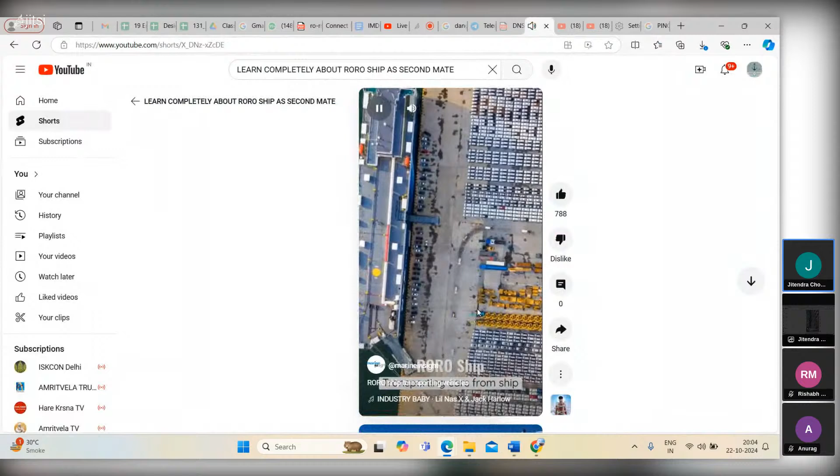So we start with just a short video reel of Ro-Ro ships, how the Ro-Ro ships are. We're going to start with Ro-Ro ships. So here you can see how on a Ro-Ro ship the cars are rolled on and rolled off the car carrier from a yard, and then it sails in the port.

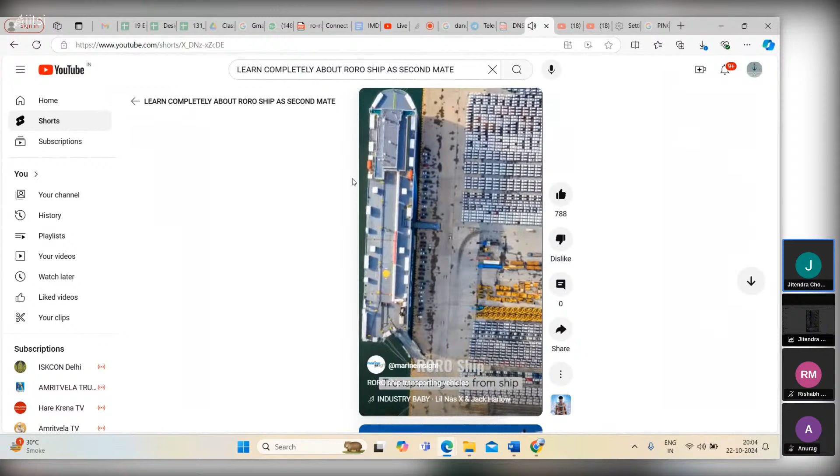So let's start with cargo operations of the Ro-Ro ship, prepared by Captain Dinyar Sidwa. So we'll go through these things: definitions, abbreviations, introduction to the Ro-Ro shipping business, types of Ro-Ro cargoes, Ro-Ro vessel types, arrangements of the doors, bow doors and stern doors, and then

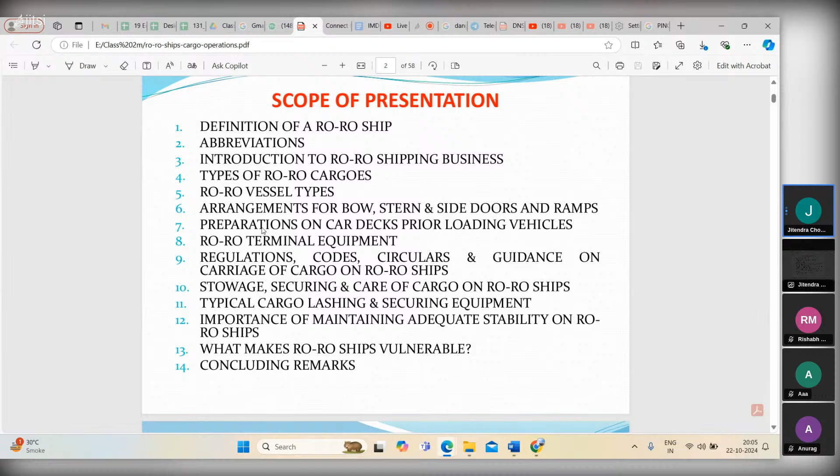preparation for loading on the decks, the requirements of the equipment, terminal equipment, codes, circulars, stowage, securing, care of cargoes, different lashing and securing requirements. How do we maintain stability on Ro-Ro ships? What are the main issues and problems regarding stability, including humans?

So what is a Ro-Ro ship basically? Vehicles or moving transport cargoes are rolled on, rolled off. Each has a few decks, either closed or open, not normally subdivided in any way, and generally running the entire length of the ship, in which goods, vehicles, trailers, and other transport units, containers, pallets, and other receptacles can be loaded or unloaded normally in a horizontal direction.

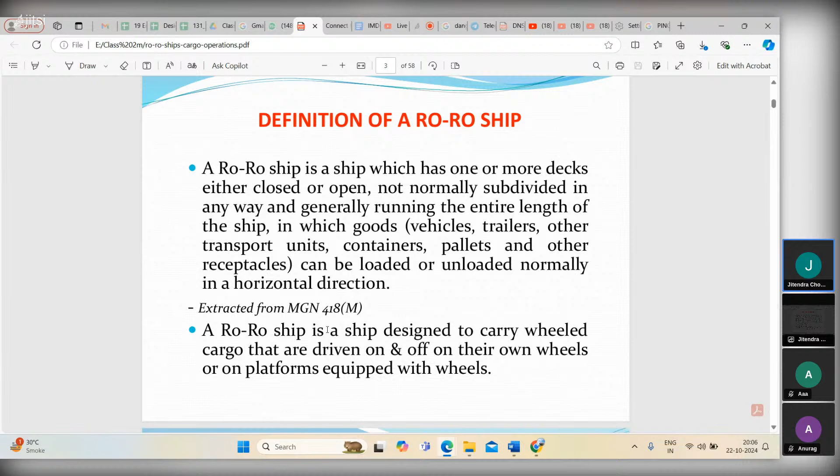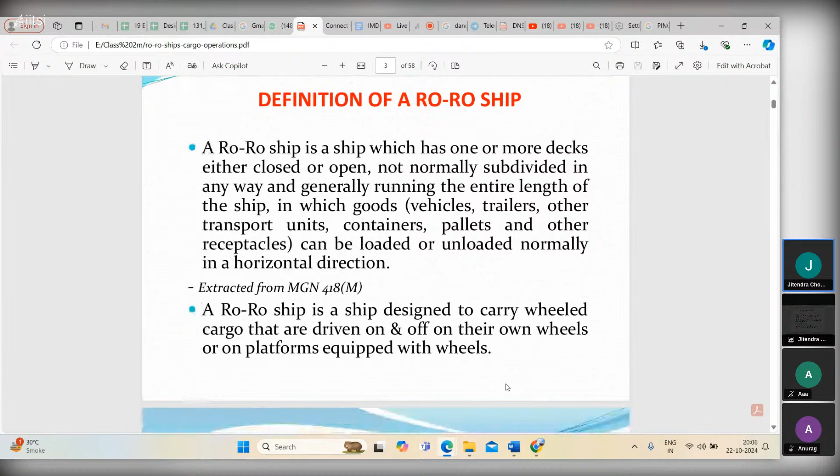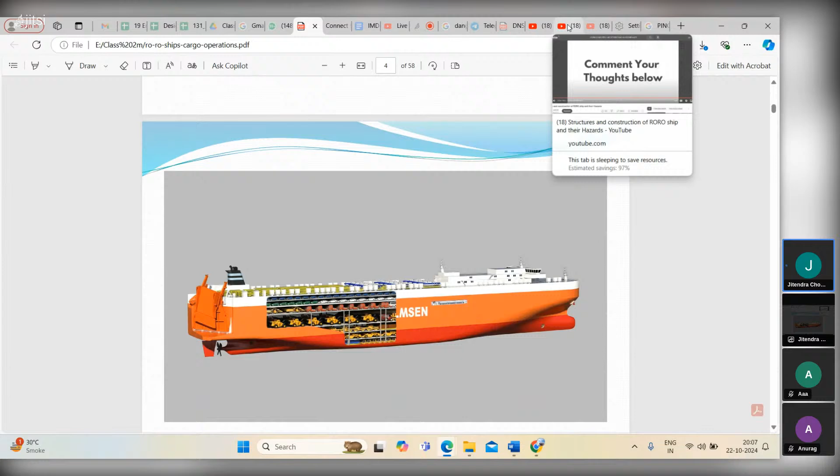A Ro-Ro ship is designed to carry wheeled cargoes that are driven on and off on their own wheels or on platforms equipped with wheels. So, what are vehicle cargoes like? On so many different decks we are loading cars, and for each deck we have many ventilators and construction like that. In between we'll see this animated video where you can get a general idea of how the Ro-Ro is inside.

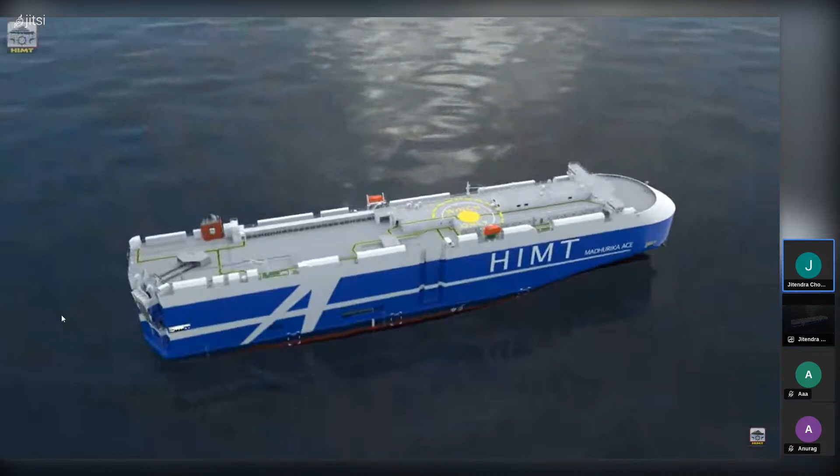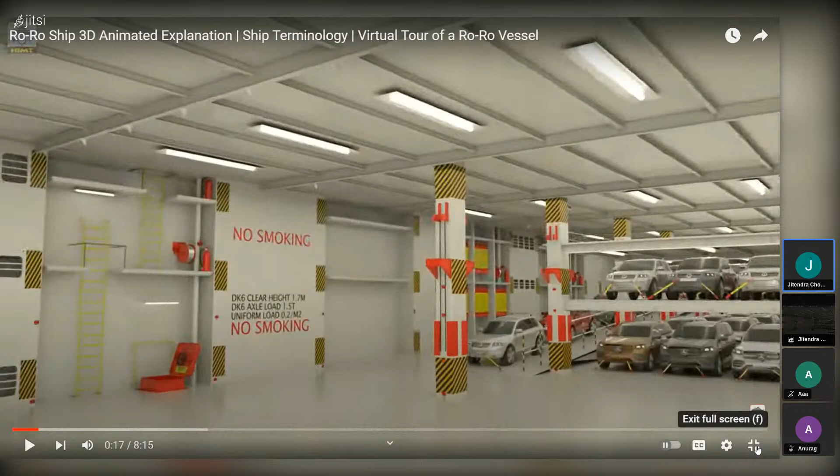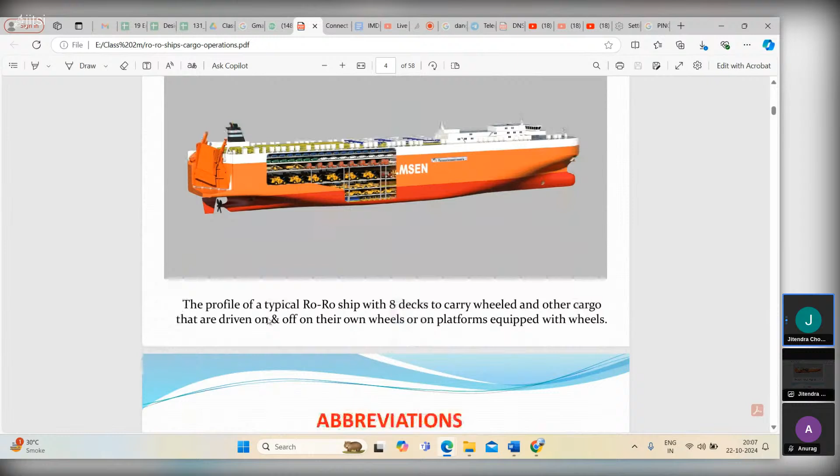There are a lot of cars loaded inside. So like this you have all the cars being loaded inside, and all the things are there: vents, accommodation and doors. This is a typical profile of a Ro-Ro ship with 8 decks. You can see 1, 2, 3, 4, 5, 6, 7, 8 to carry wheeled and other cargo. These decks are movable, adjustable for height, and divisible. A lot of adjustments are there as per the cargo to be loaded.

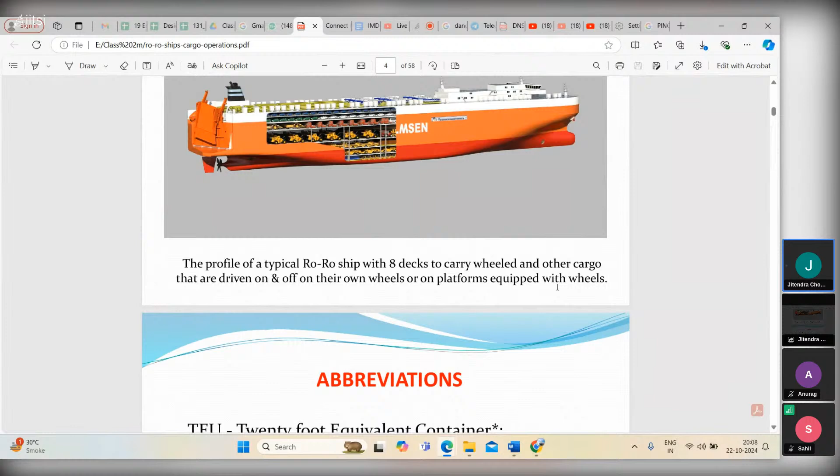And other cargo that is driven on and off on its own wheels or on platforms equipped with wheels. So either a cargo is coming on its own wheels, or it is driven on a tractor, flatbed truck, trailer like that. Like containers, you have the twenty-foot equivalent unit. PCTC, pure car truck carrier; LCTC, large car truck carrier; PCC, pure car carrier. These are the types of ships, carrying pure cars or trucks or whatever type of cargo.

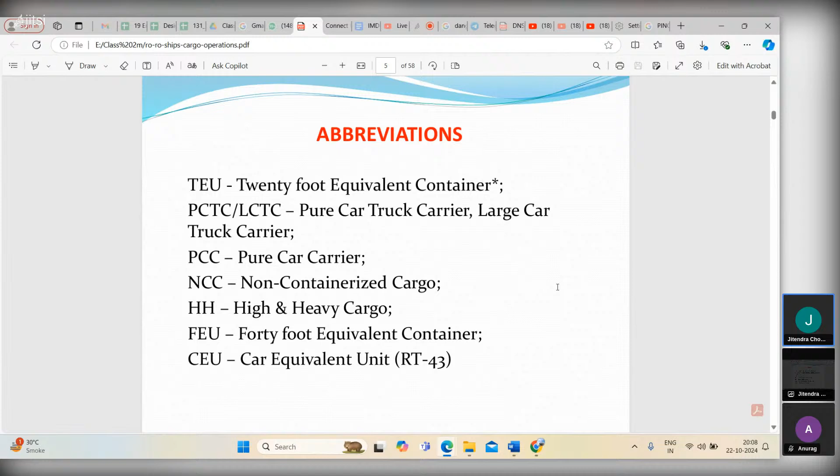NCC, non-containerized cargo. HH, heavy and high. FEU, forty-foot equivalent unit. CEU, car equivalent unit. So when did Ro-Ro ships mostly start? Around the 1940s and early 1950s, almost 85 years ago. The main idea was to carry commercial vehicles, men and material, from amphibious craft used during the war to roll out tanks, soldiers and combat equipment on sloping beaches. Necessity is the mother of invention. During the war it was really needed, so it started and then continued.

So the idea of carrying commercial vehicles, men and materials is there. Then you have so much wheeled cargo. Say I am in Gujarat now and I need a car here, so how will I transport it? By road, a truck will carry it, which will be cheaper, or by train, but it has to be safe. By train sometimes it's not quite safe. Even on a ship, in bulk it might be cheaper, but it is exposed to weather, rolling, pitching and so many things. Damage is quite easily possible. That's the biggest challenge, and there are some other challenges we'll see.

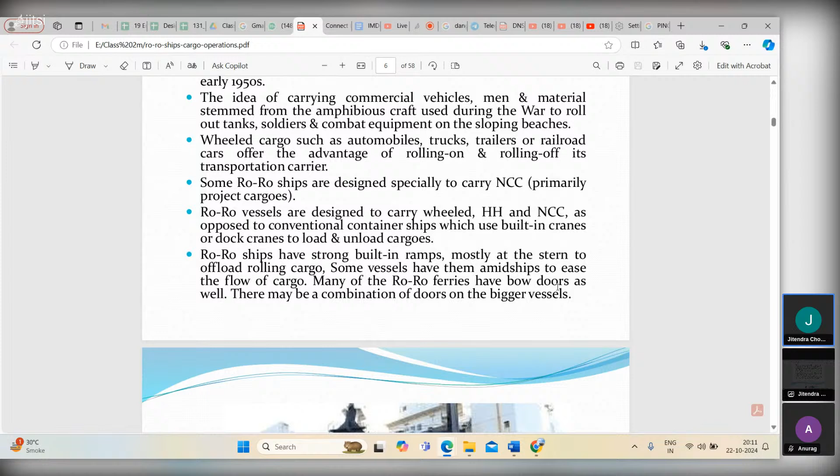So Ro-Ro ships are designed especially to carry NCC, primarily project cargoes. There are some special Ro-Ro ships which carry special project cargoes. Roll on, roll off means there are wheels mostly, or cargo supported by wheels, HH and NCC, as opposed to conventional container ships which use built-in cranes or dock cranes. Sometimes we also use cranes if the cargo is not on its wheels, or it doesn't have wheels, or for some reason it cannot be rolled in.

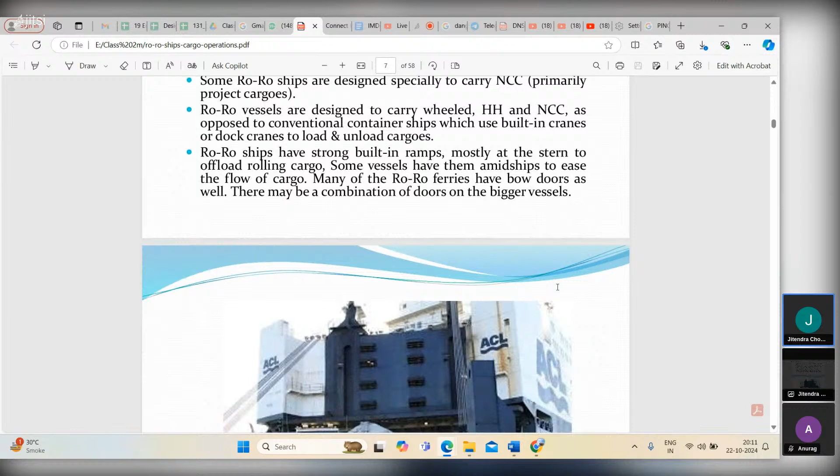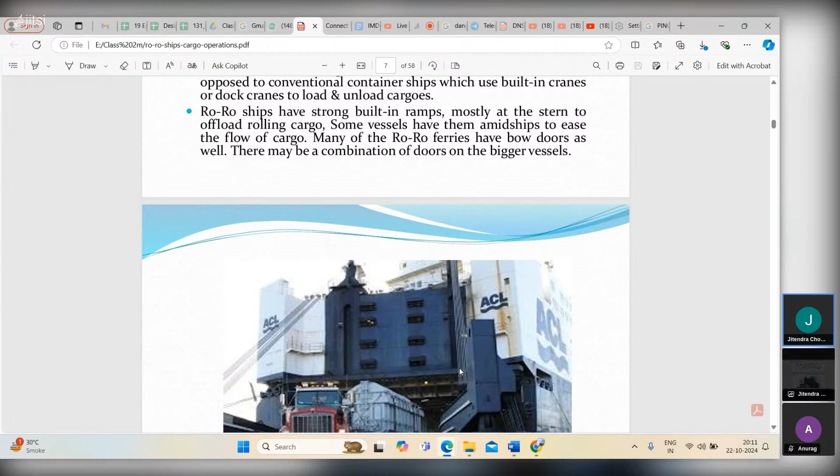Then of course a Ro-Ro ship mostly has built-in ramps, like you see here, this blue-colored built-in ramp is down. This is a built-in ramp open for this ship.

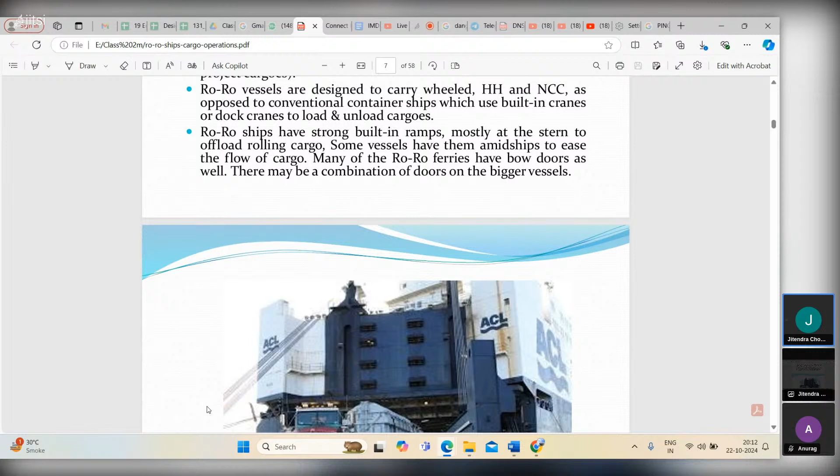Mostly they are in the stern, ramps to offload the rolling cargo, and some vessels have them amidship to ease the flow of cargo. Depending on the type of ship, they can be in the stern or in the midship, or you can have one small door and one big door. Like local ferries, you have forward and aft, or one on the side, one on the back. So there are different combinations possible on different ships.

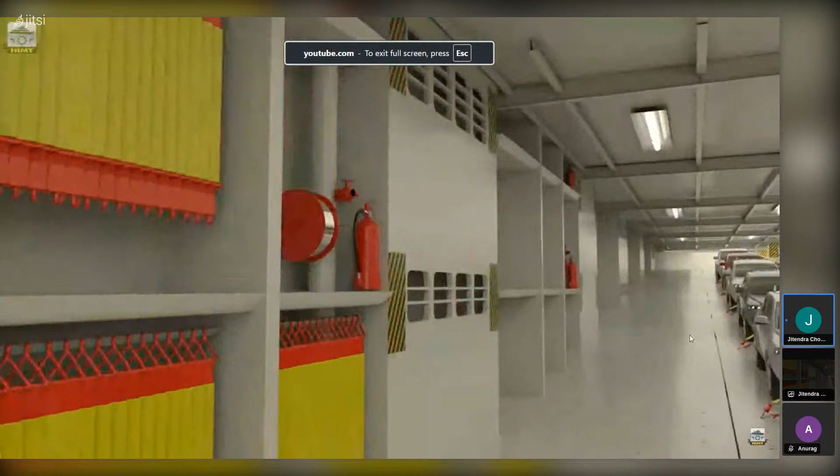So let's see a little more what is there in the cargo ship. You can see these nice clean decks with all the firefighting equipment, and the cars are properly lashed, and all the EEBD or whatever emergency firefighting equipment are there. And then there are zebra markings everywhere for cautions or highlighting, especially in case there is a blackout or something.

Excuse me, sir. Do car carriers follow any specific code except the cargo securing manual? No, there is not a particular specific code for a car carrier, only the other lashing codes like the cargo securing manual or code of safe working practices. Okay, sir.

In some trades, it is customary that contracts give the ship owner the right to transport a percentage of the cargo owner's production quantity. So you have to give some percentage of cargo for the owner, of course. The shipments are normally scheduled where the majority of itineraries are predetermined and regulated by contract. So here again, like container ships, the timings and port rotation are very important.

Like when we are transporting any courier, especially an Amazon parcel, you keep tracking it, all those things. Same way here also people are waiting for their cars, so it cannot be late, maybe 1 or 2 hours, but normally ships get delayed for 1, 2, 3 days, if you're on anchorage maybe 10 days also. But in this type of transport, it has to be as precise to the time as possible, because it will affect your customer reviews and responses and hence your earnings.

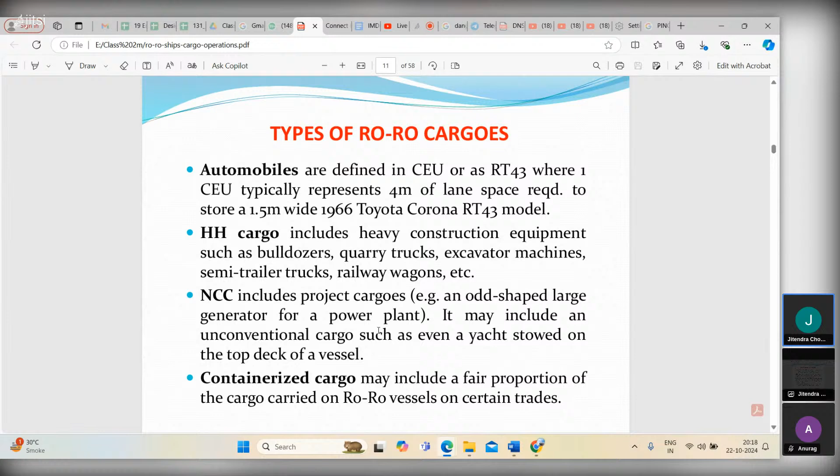So what are the different types of RoRo cargos? Automobiles, where you have CEU, car equivalent unit, RT43. So different sizes or different models of automobiles, heavy and high cargos, bulldozers, trucks, machines. Then unconventional cargo, such as even a yacht stowed on the top deck of a vessel, or odd-shaped cargo like a large generator of a power plant. Then different containers also you can sometimes load on a car carrier. Sometimes you load cars in containers.

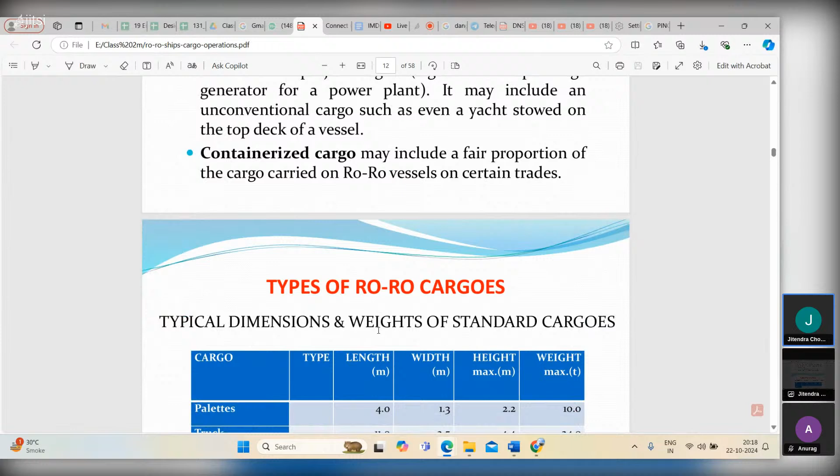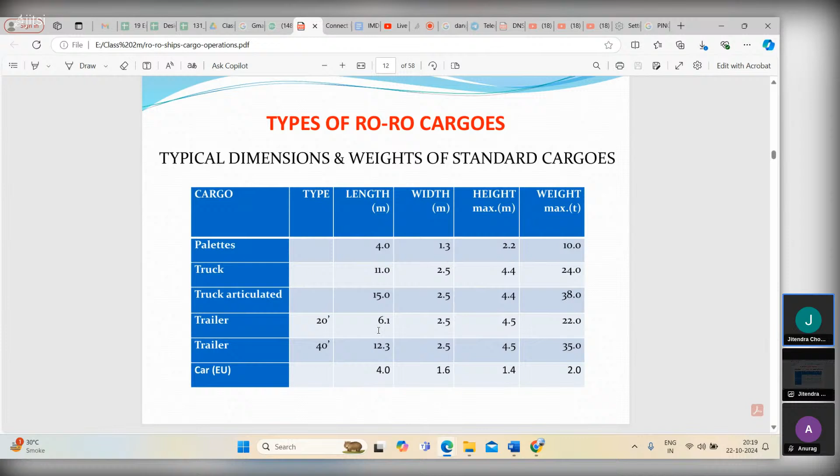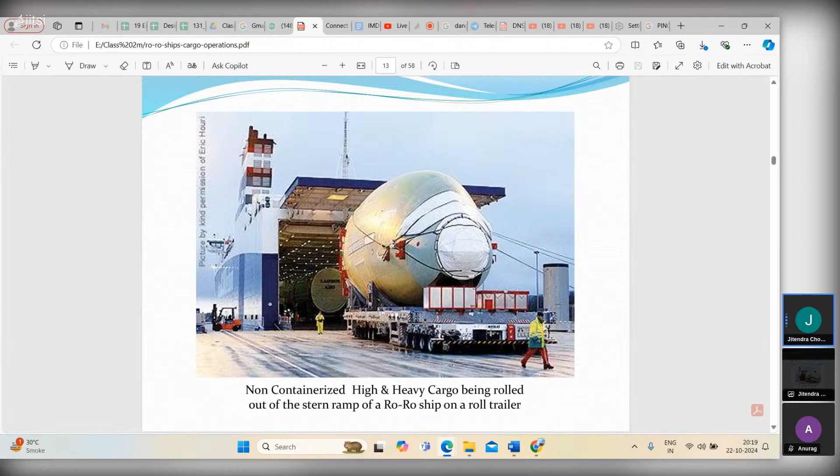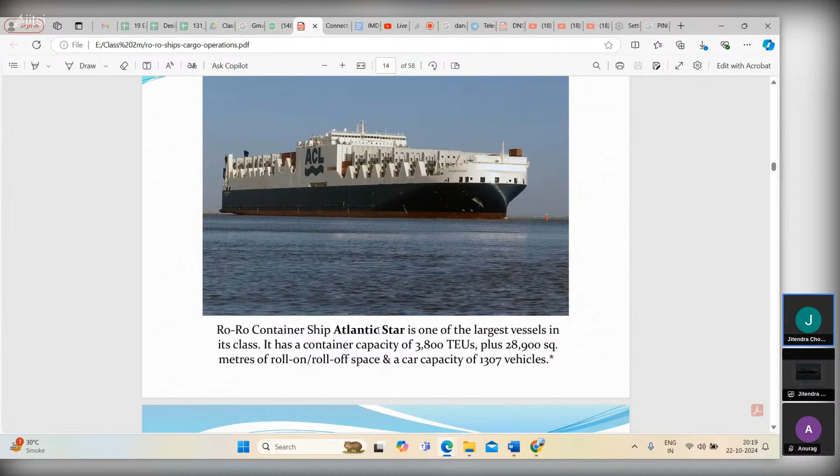So what are the different types of RoRo cargos? Pallets, truck, articulated trailer, car, with length and height max. So the different sizes of standard cargoes are given here. Now this is a very different high and heavy cargo, some special machinery rolling out of a stern ramp. It is one of the largest ro-ro container ships, 3,800 TEUs. So let's continue our animation a little.

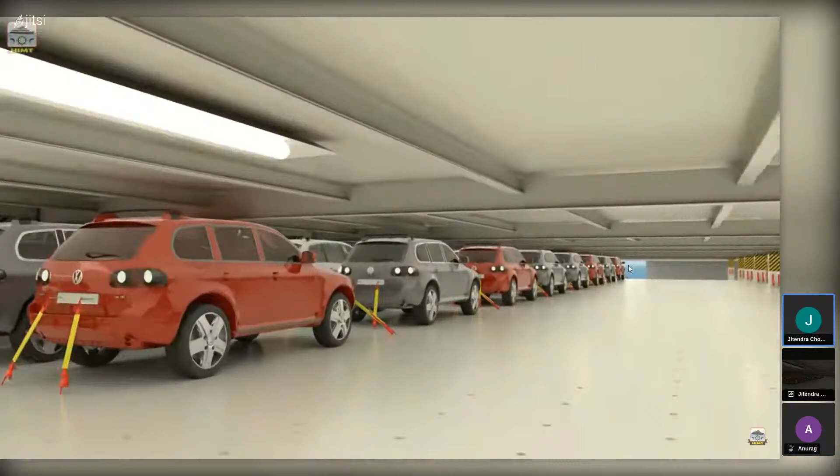So they are all not like there is a proper spacing requirement as per this cargo securing. How much should be the distance in between the vehicles: athwartship 30-40 centimeter and forward and aft 60-70 centimeter. We all will see all those. But here you can see how closely they are stowed and how they are lashed neatly in different places, yet seemingly overlapping each other's area. But it's not recommended or advised. We have to check properly.

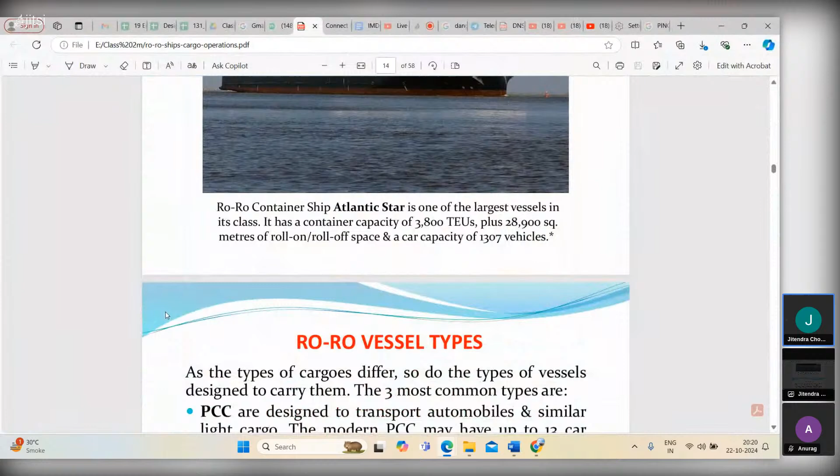And the angle of the lashings from the bottom horizontal and side horizontal. All our angles are important, 30 to 45 degrees like that. Okay, let's continue. So this is the biggest container ship, 3,800 TEUs, and also works with roll-on, roll-off, with a car capacity of 1,300 vehicles.

What are the different types of ro-ro vessels? Types of vessels designed to carry them. The three most common types: PCC, as we saw, pure car carriers. Two of them at most are hoistable. These type of vessels are usually the smallest of the ro-ro designs and typically have a length of less than 200 meters. Cargo capacity ranges from 1,000 to 6,500 RT-43 or CEU.

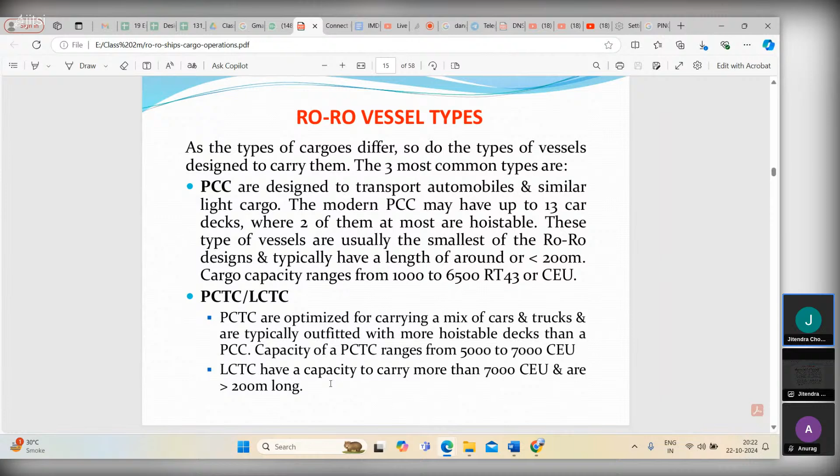PCTC, LCTC, carrying a mix of cars and trucks and typically outfitted with more hoistable decks than a PCC. Capacity of a PCTC ranges from 5,000 to 7,000 CEU. LCTCs carry more than 7,000 CEU and are more than 200 meters long. Ro-ro cargo vessels are designed to carry mostly HH and NCC, with automobiles and containers as supplementary cargo. A typical vessel has a length of between 240 and 300 meters.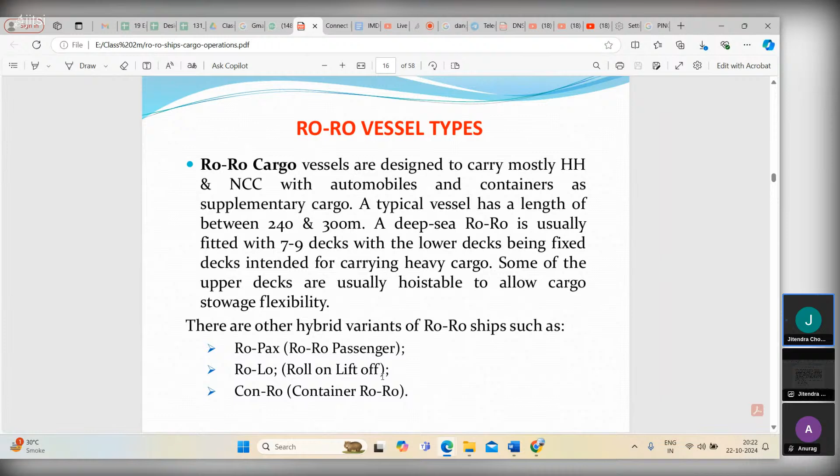A deep sea ro-ro is usually fitted with 7 to 9 decks, with the lower decks being fixed decks intended for carrying heavy cargo. Some of the upper decks are usually hoistable to allow cargo stowage flexibility. There are other hybrid variants of ro-ro ships such as ro-pax, so it has passengers also, roll-on and lift-off, like lifting for some cargoes, con-ro, container and ro-ro. So there can be many combinations.

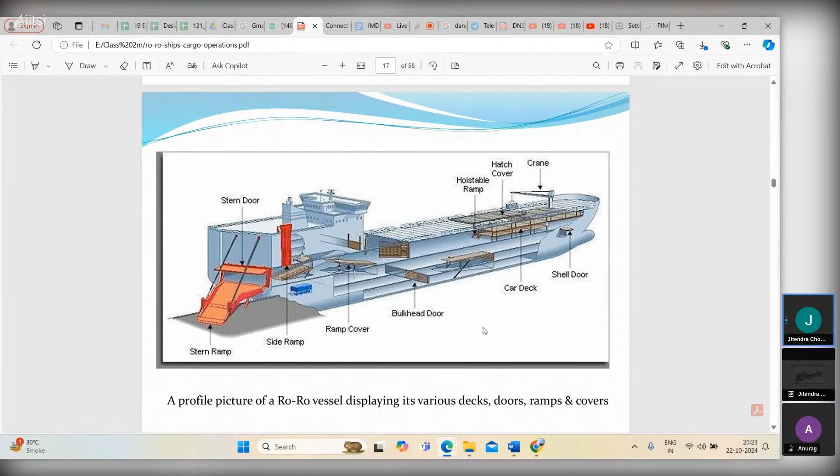So as I told you in the starting, these ramps are hoistable. You can adjust the height and segregate them, make partitions as per the cargo to be loaded. And they have full hatch covers, cranes on the ship itself. So you have a side ramp and a stern ramp. So you have both. This is the ramp cover, bulkhead door, the car decks, shell door for pilots or something. So this is a profile picture of a ro-ro vessel displaying its various decks and ramps.

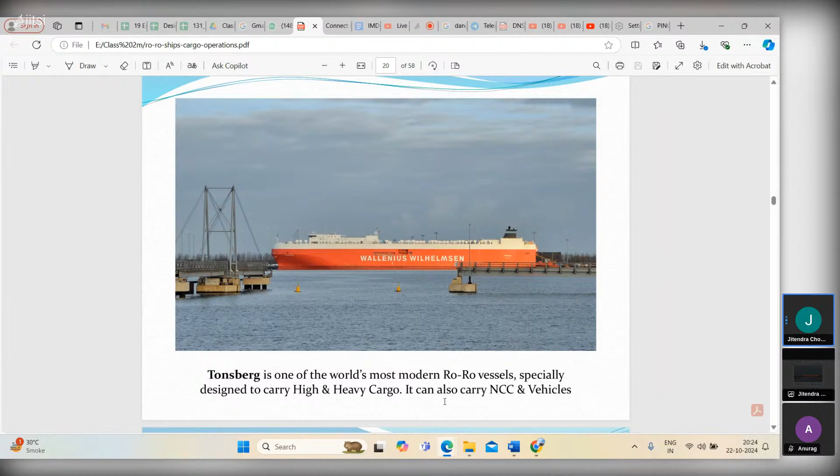So, what are the arrangements for bow, stern, side doors, and ramps? Stern ramps open up to provide max width and height clearance for a variety of vehicles. Some designs have employed stern quarter ramps. These may be supplemented by ramps amidship or bow visor options to permit drive-through capability. Lifts to lower cargo holds may be of mechanical or hydraulic operation. Internal ramps provide access to higher decks. All cargo ramps are fitted with wheel tread anti-skid steel grips. Ramps are operated generally by twin hydraulic cylinder actions or winch arrangements.

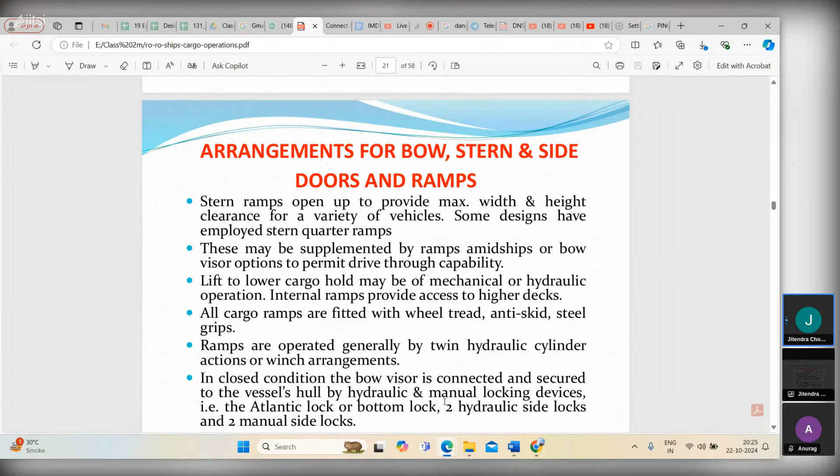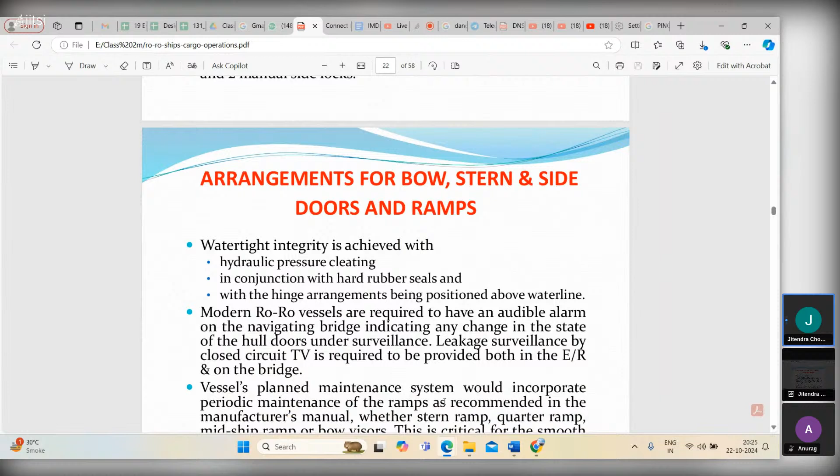In closed conditions, the bow visor is connected and secured to the vessel's hull by hydraulic and manual locking devices: the Atlantic lock or bottom lock, two hydraulic side locks, and two manual side locks. Watertight integrity is achieved with hydraulic pressure cleating in conjunction with hard rubber seals, with the hinge arrangements positioned above the waterline. Modern ro-ro vessels are required to have an audible alarm on the navigating bridge indicating any change in the state of the hull doors under surveillance.

Leakage surveillance by closed-circuit TV is required to be provided both in the engine room and on the bridge. The vessel's planned maintenance system would incorporate periodic maintenance of the ramps as recommended in the manufacturer's manual, whether stern ramp, quarter ramp, midship ramp, or bow visors. This is critical for the smooth functioning and integrity of a ro-ro vessel. So we have to make sure that you maintain the ramps, because the ramp is very crucial. If there is any leakage or water is coming, the full ship can capsize, as has happened in previous cases.

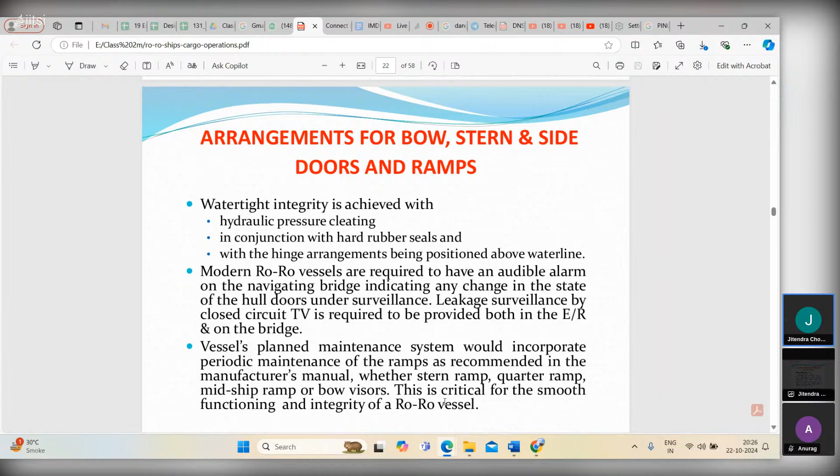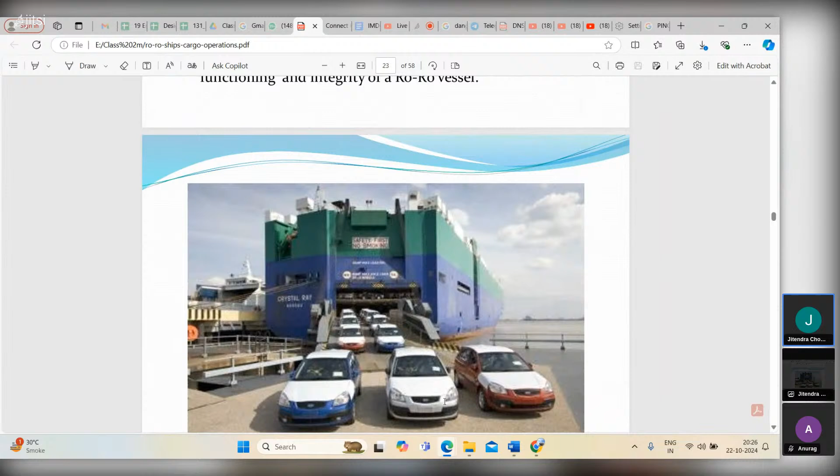So maintenance of the ramp is important, it is a very big opening. So water tightness and all things are very important, especially the quarter ramp. So you see such a big ramp opening, and if it is having any issues, that will be a big issue. So what are the precautions you will see while loading or discharging cars? We'll see after a minute.

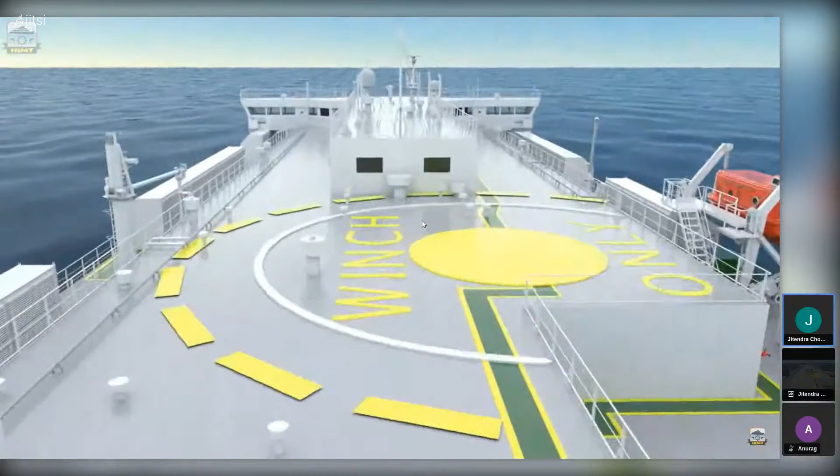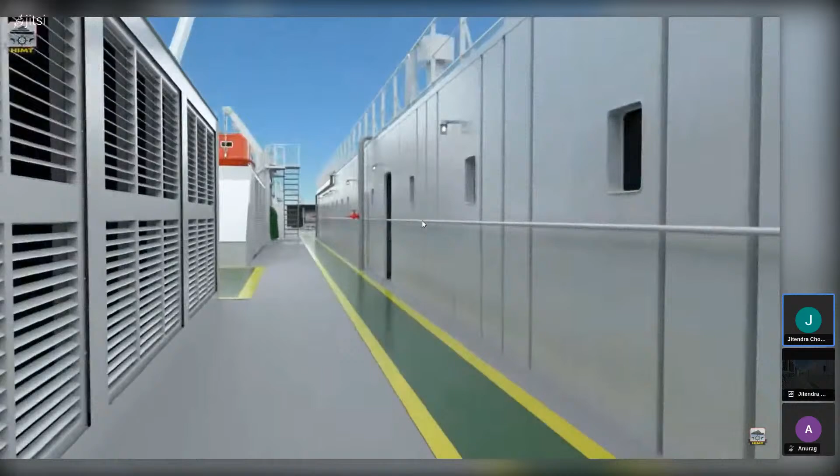Winches, main deck, foremast, forward accommodation because of the height, side walkways, alleyways, midship winch, stores, ventilation for every deck,

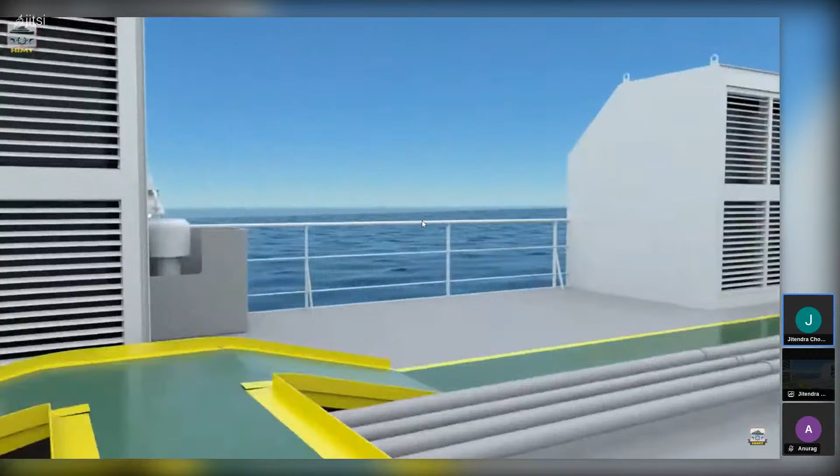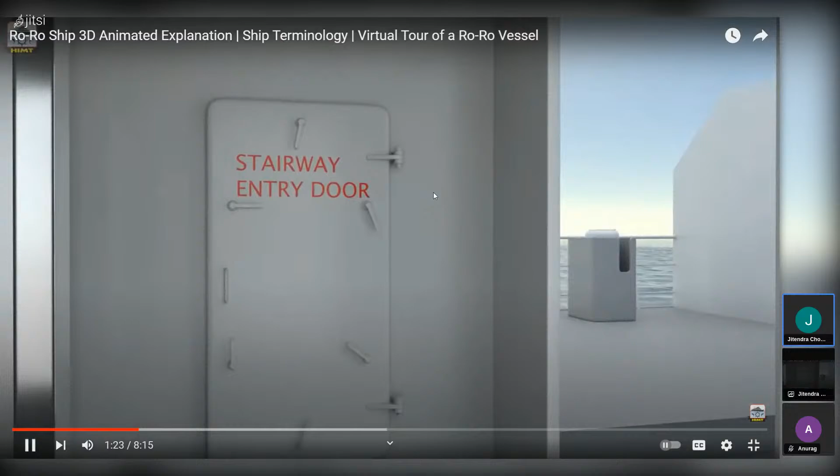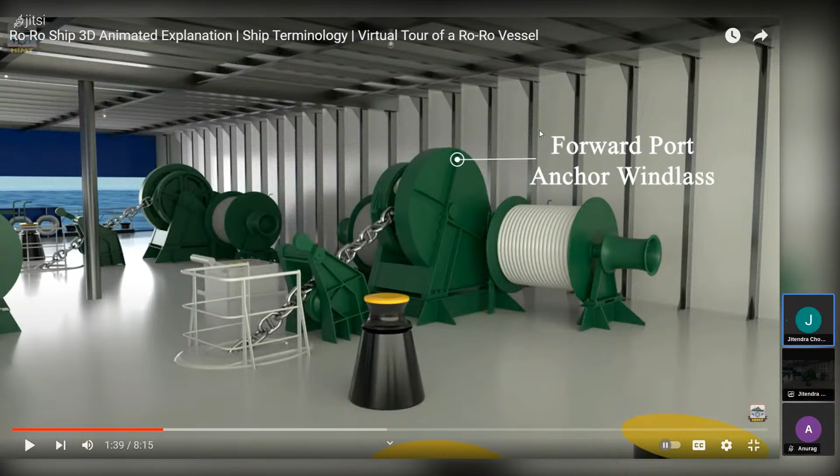so very nice animation, doors, doorway for the stern, for the car decks, then winches in the forecastle, and forward anchor windlass. So, we'll continue with that.

So, what precautions will you take while opening and closing the ramps? Obviously, first you will see that there are no human obstructions or boards or something, because no person should get injured and no property should get damaged. And even on the ship side, our ship, everything is clear, lashings are open.

So then, onboard operations and maintenance manual. Like you were asking for the book or any code. It's not an official code, but for every ship there is an onboard operations and maintenance manual. This is the reason, because like we saw, there are so many different combinations of ro-ro vessels. So you cannot have one manual or book or code for these car carriers. And their percentage is also quite less. So there's no special code, but your specific ship type should have an onboard operations and maintenance manual

describing the procedure for opening and closing. Excuse me, sir, who provides that manual? Your company will provide it, the company QMS department. They will make it as per ISM, and if required, get it approved from the operations department, and they will provide that.

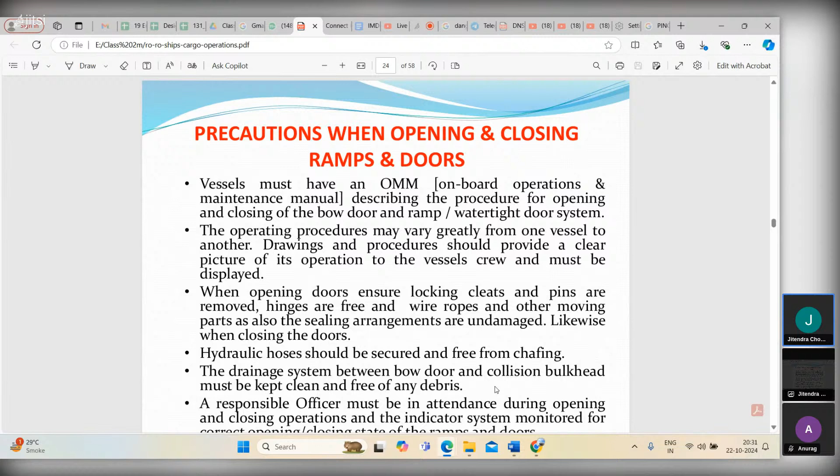Likewise, when closing the doors, hydraulic hoses should be secured and free from chafing. The drainage system between the bow door and collision bulkhead must be kept clean and free of any debris. A responsible officer must be in attendance during opening and closing operations, and the indicator system monitored for the correct opening and closing state of the ramps and doors.

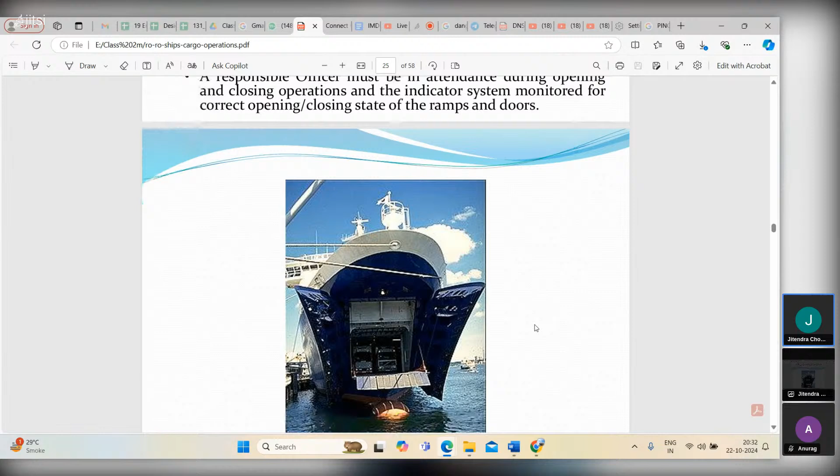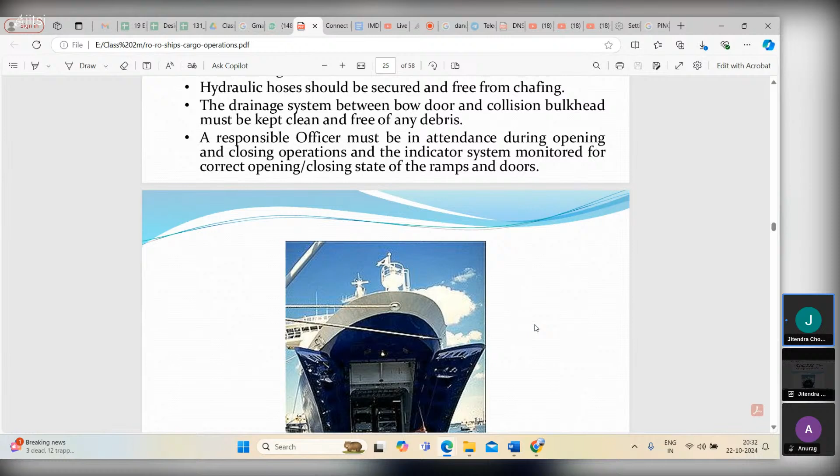So there is a monitoring system for opening and closing of the ramps. First you have to clear everyone, and then there is an alarm, and an indicator at the same time as the alarm, and everyone should be clear. Then our responsible officer must be monitoring. The hydraulic system should already be inspected with no leakage. The drainage system should be good. So an audio-visual alarm should be there with the light.

And it is crucial for the ship staff to ensure that the ship's access doors are kept well maintained and do not get damaged, as flooding in the cargo decks can be catastrophic. So make sure the doors are properly maintained so that there is no accident or ingress of water.

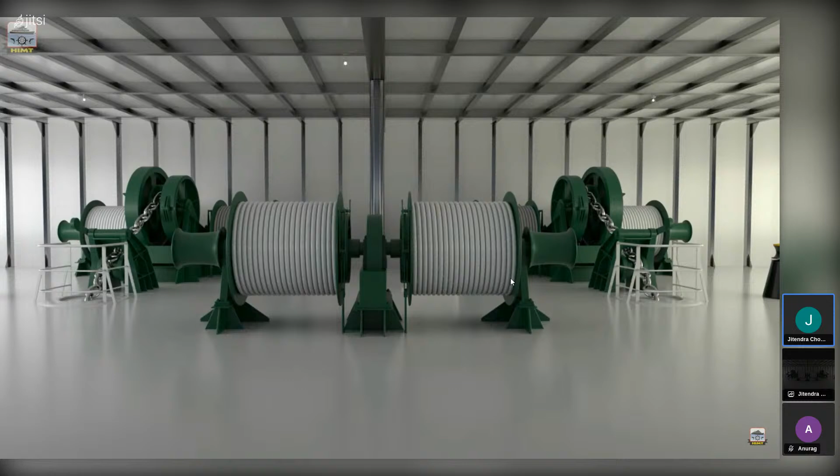So let's see. The normal forecastle deck, but the forward mooring station is not in the normal forecastle level; here we have higher decks also, but the forecastle is here only.

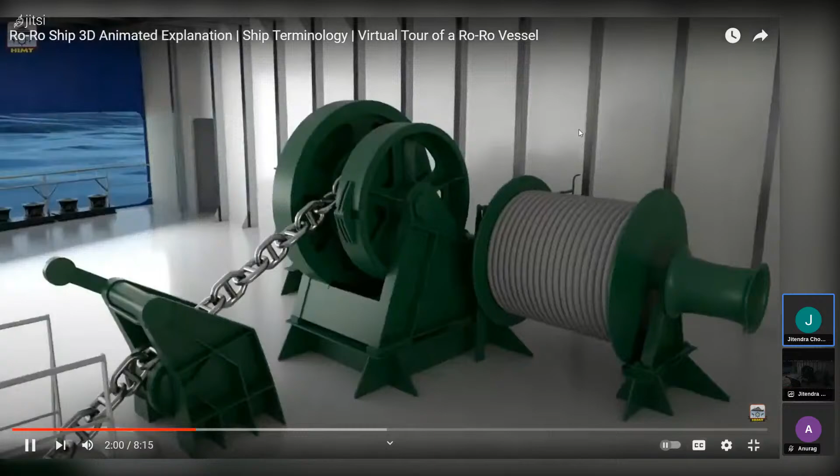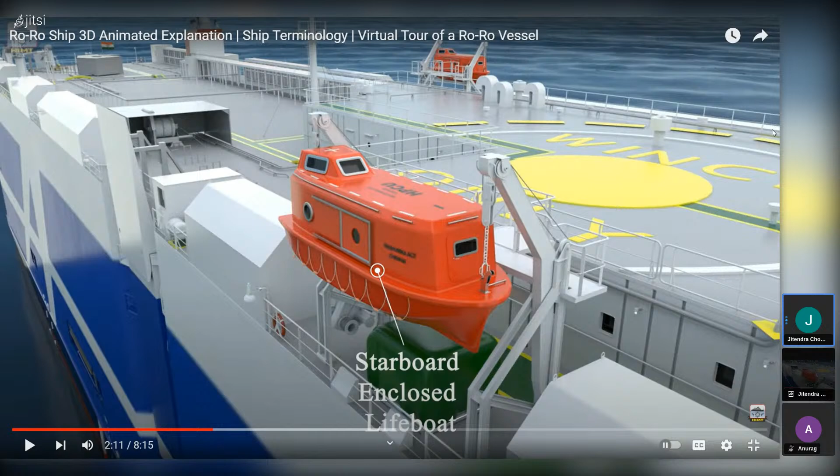Life boats, enclosed life boats. So there are many things we will keep checking. Then the sealing arrangements of the ramps, water tightness test at the dry docks, chalk test, all this has to be there.

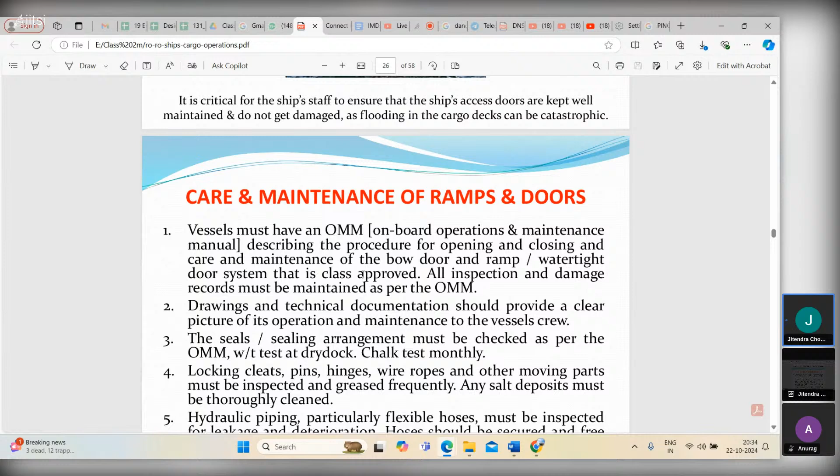Locking cleats, pins, hinges, wire ropes, and other moving parts must be inspected and greased frequently. Any salt deposits must be thoroughly cleaned. Hydraulic piping, particularly flexible hoses, must be inspected for leakage and deterioration. Hoses should be secured and free from chafing. Any external hoses must be replaced at 5 yearly intervals. Spare hoses, seals, gaskets should be carried on.

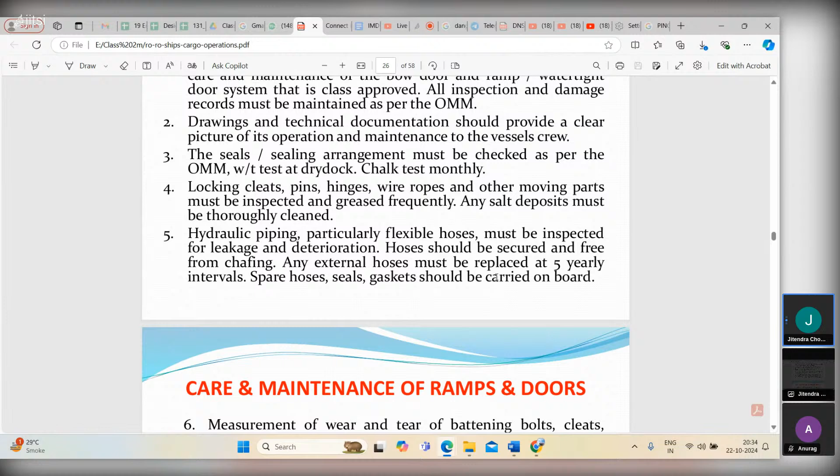Care and maintenance of ramps and doors. Measurement of wear and tear of battening bolts, cleats. So whatever maintenance repair we have to do, we have to make sure that it is happening, and then only we are using the proper locking devices, and they should be lubricated and defect free. So there should be no damage to any locking devices or securing devices.

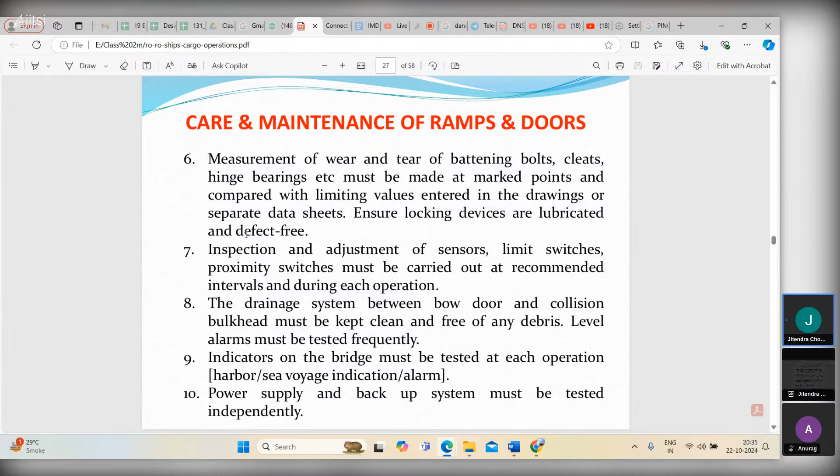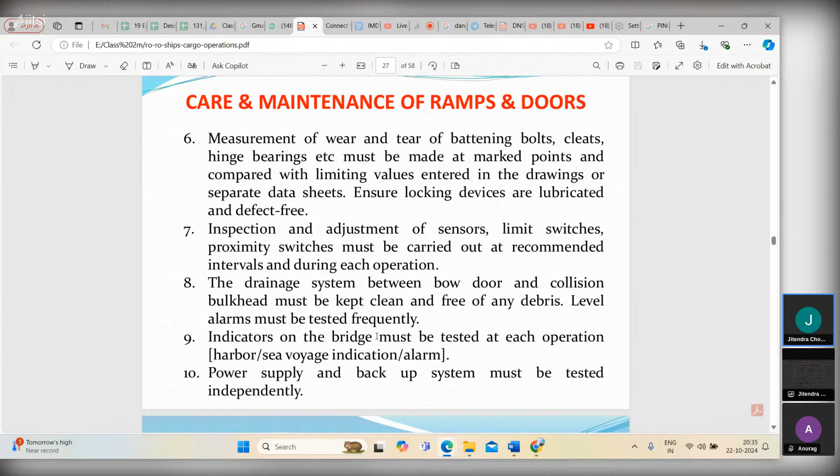It should be properly inspected. Adjustment of sensors, limit switches, proximity switches must be carried out at recommended intervals and during each operation. The drainage system between bow door and collision bulkhead must be kept clean and free of any debris. Level alarms must be tested frequently. Indicators on the bridge must be tested at each operation. Harbor, sea voyage indication, alarm. There are indicators for each operation. Power supply and backup system must be tested independently. So wherever the power is required, that you can do.

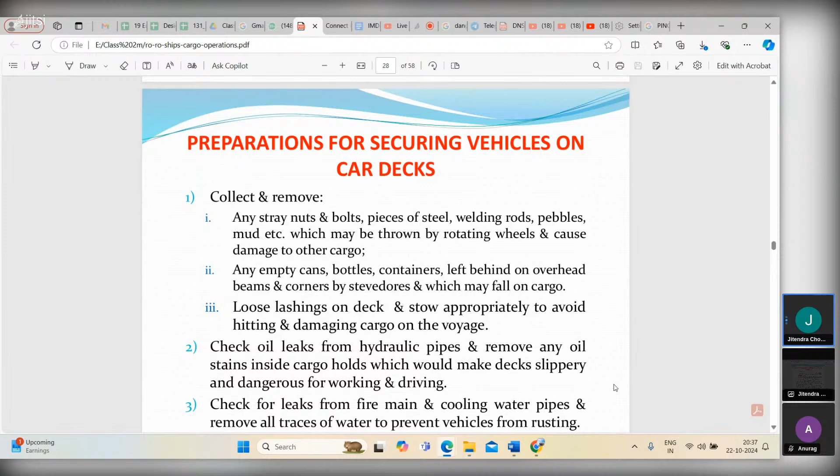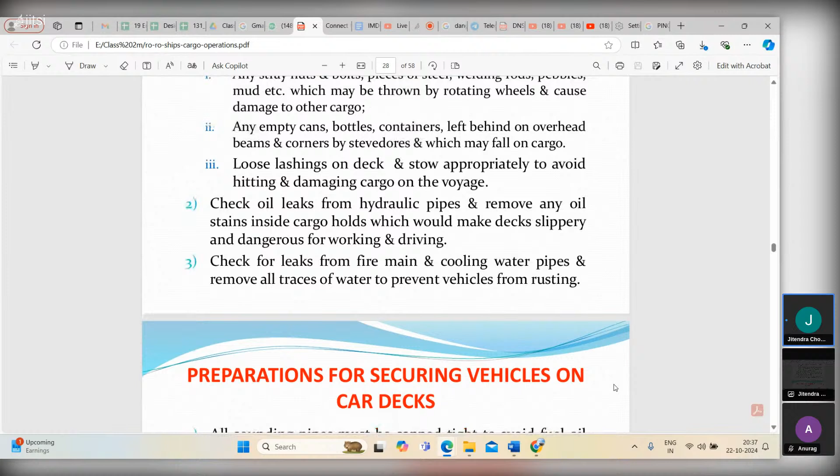Then no oil leaks, because it's a big problem. It's flammable. So in many cars we put as little fuel as possible, but still, if it is leaking, there can be fire. So make sure there are no oil leaks. If there is some oil, you have to remove it immediately so that there is no slipperiness or dangerous working environment, especially for drivers. Then we have to check the leaks from any fire main or fire appliances, FFA, or cooling water pipes. And all water should be removed.

And if you are loading cars or any vehicles on car decks, you have to take proper soundings because there might be some fuel or water from the spray. Then there are bilge wells. They should be cleaned, dried out before loading, and ensure that the scupper discharge overboard on the higher deck shall be kept clear. So if there is any water flow, weather seas, it passes easily. No stability issues. Deck area must be well illuminated. So of course there should be proper illumination all the time. So we need bigger generators, power supply.

Deck areas must have extraction fans operational to change air volume 10 times every hour to prevent buildup of exhaust gases. So proper ventilation fans have to be there. And the fire protection system, generally sprinkler or water drenching, must be tested and fire extinguishers available at every 40-meter length. So this is the standard requirement at every 40-meter length. You should have a fire protection system which can be sprinkler, water, or any other equipment.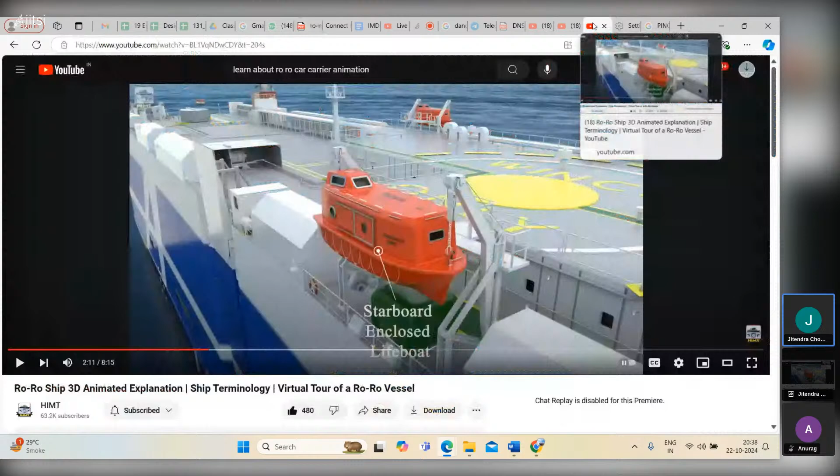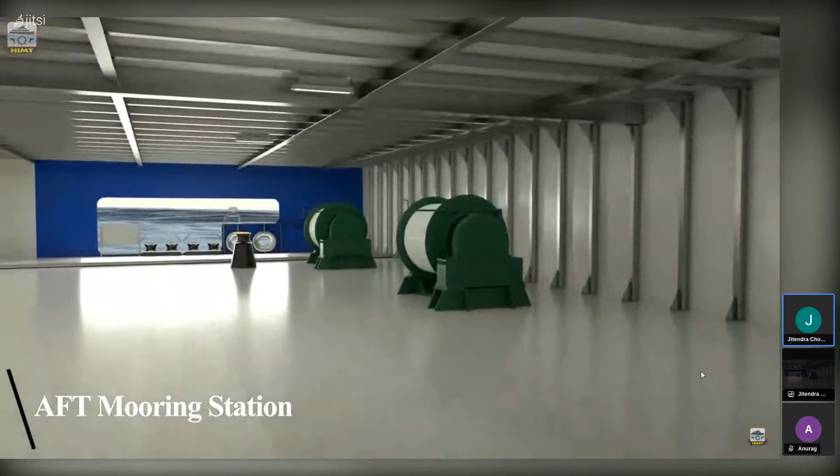So this is the side ramp, gangway, draft marks, pilot ladder. So basically, the ships have different service and bunker stations, aft station. Madhurika, all the cars are loaded inside. So we'll go to the last part.

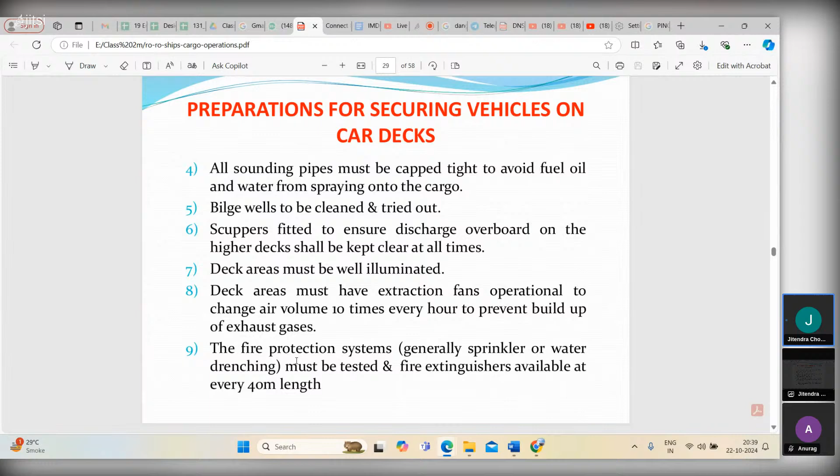Deck areas, fire protection system should be there, sprinkler or water drenching. Then preparations for securing vehicles on car deck. Such protection dictates that the drainage system must also be periodically tested to clear any residual water. Vehicles require wide open deck space to be able to maneuver, and the deck areas have to be lane marked for vehicle storage. Ensure smooth operation of hinges and internal lifting wires of bulkhead doors, liftable decks, internal ramps, etc.

While floating car decks are adjusted to required heights. So you can adjust the car decks as we saw by opening the ramps or stanchions, rope railings, just removing some lashings and adjusting the ramp height, like nowadays you have movable parkings. Same way, movable ramps are there, but you should be very careful wherever you are moving.

Deck spaces shall be clearly signed, painted to reflect instructions, including any speed restrictions to drivers. So whatever warning signs for drivers, not driving fast or which side to drive, left side, right side. So there's a plan where to go, directions provided; everything should be absolutely proper.